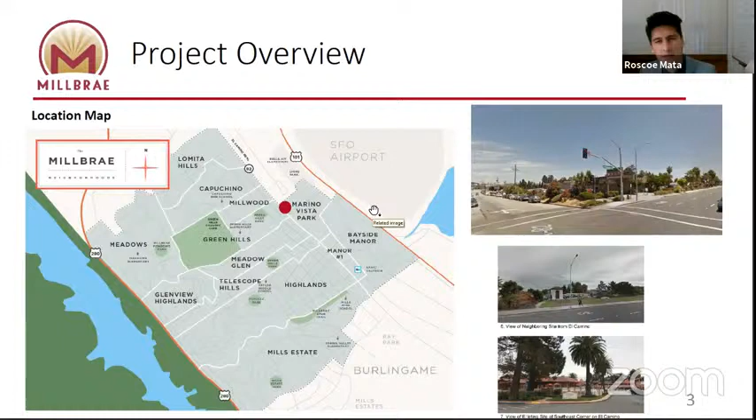The next slide, please. The existing site is approximately 6.7 acres, currently occupied by the Best Western El Rancho Inn. The project includes a lot line adjustment and lot merger to create two separate parcels. The main parcel would be 5.5 acres and would contain a 384-unit multifamily residential community. The other parcel would be approximately 1.2 acres and would be the site of a future hotel, which is being negotiated through a development agreement with the city.

While the hotel design is not included in this particular project, the applicants are here tonight and will be able to provide an overview of the hotel concept being considered.

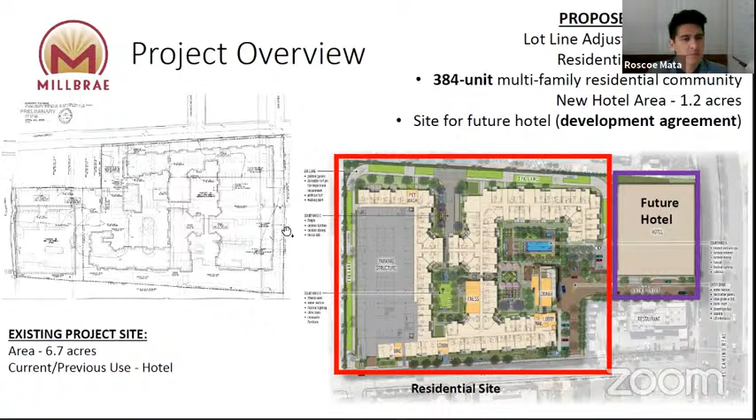The project being proposed under the current form, as you can see here, is proposed to be 384 multifamily units consisting of several types of bedrooms: studios, 1-bedrooms, and 2-bedroom units that range from 508 square feet to 1,360 square feet in size. There's a total of 560 parking stalls, 11 of which are unassigned, and these parking stalls will be unbundled from the main units.

There's also a transportation demand management program that will reduce vehicular trips. The amenities in this project include courtyard areas with a pool and spa, a community lounge area, fitness center, resident mail lobby with parcel lockers, bike storage and a bike kitchen, as well as a leasing office.

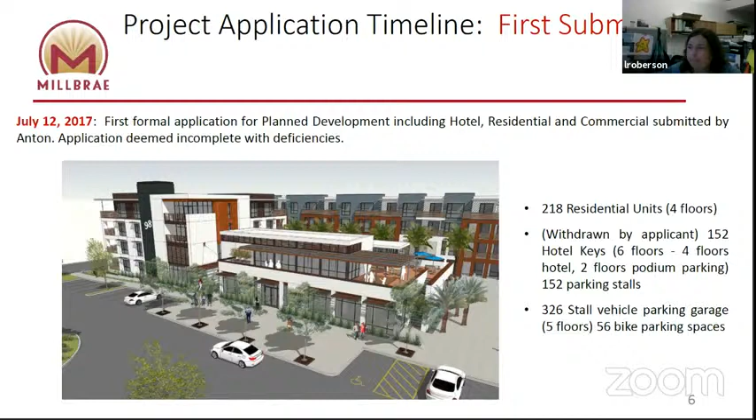2 floors were podium parking, and then a 326 stall vehicle parking garage. On February 14th, 2018, the second formal application with revised site plan of new Planned Development was submitted. This round included 237 residential units, again on 4 floors. This was withdrawn by the applicant, which was the hotel of 159 rooms. Again, it had 6 floors, 4 of which were hotel, 2 of which were podium parking.

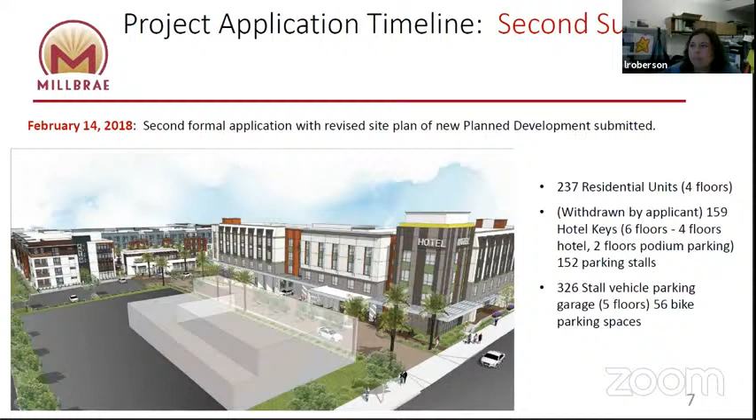326 stall vehicle parking garage was also included in this development application. The third submittal, submitted on May 15th, 2019, was a formal submittal and all previous applications were withdrawn. This application again omits the hotel, the commercial, and the planned development components. With this current submittal, there were 384 residential units, of which 5% or 19 units were in the very low income affordability bracket. There was a 560 stall vehicle parking garage, which was 5 floors, and then there were an adjusted 72 biking spaces.

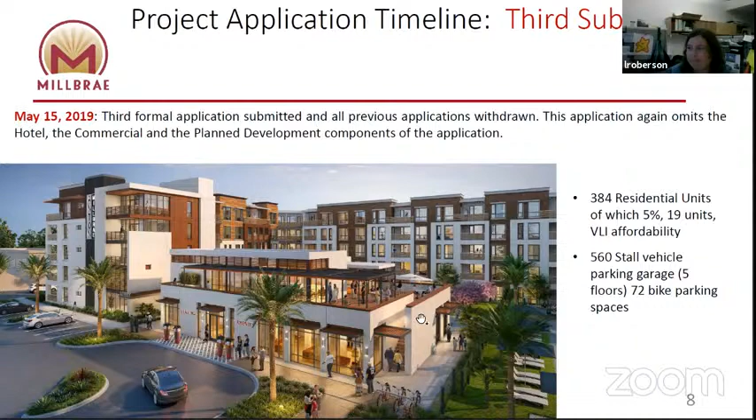That brings us to today's most current application, which was resubmitted on April 6, 2020. It's the most recent submittal. The city and the applicant are currently negotiating a development agreement allowing the residential and hotel to move forward concurrently. Right now, we're looking at 384 residential units, of which 5% or 19 units are still in the very low income affordability bracket, a 560 stall vehicle parking garage, and we're currently waiting for an applicant to submit plans for a 150 to 200 key hotel.

Sorry, Linda, if I may stop you for just one second, back up a little bit. So they're looking for a development agreement. Does it mean that it's requiring a legislation to happen? It's not required in the legislation for that to happen, no. But it's a developer agreement between the city and the developer, is that correct? Right, that's what we're working towards. And that does not require council intervention? Sounds a little surprising to me. I believe that's what's still being negotiated. Okay, got it. All right, so, all right, please continue, sorry. Sure.

The first item we would like to address is urban design and how the proposed design addresses connectivity, specifically for pedestrian and bike users. This slide shows the location of the site and its relationship to key city assets, nearby parks, greenways, and the BART station. A key benefit noted in the proposed design is its proximity to transit.

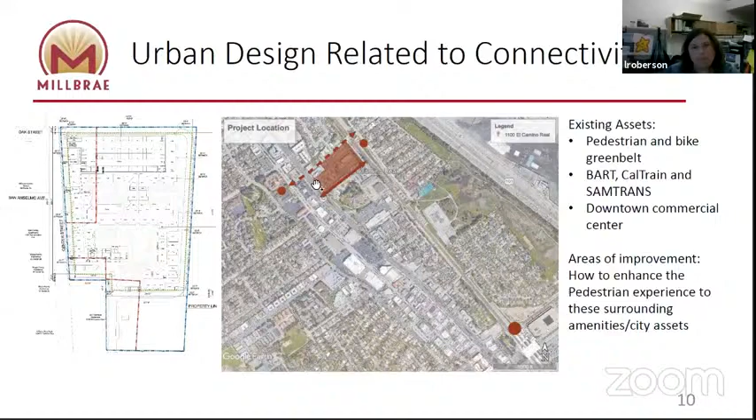Okay, thank you. Sure. This slide is presented in order to make this area a more inviting place to walk. Some proposals include new medians. This would provide opportunities for green infrastructure and management of natural drainage systems, which we're promoting and integrating with the county. It encourages more green spaces and public spaces and improves the aesthetics of the street generally.

We're looking to encourage all users by providing ADA connectivity. We want to improve pedestrian comfort and safety by including wider sidewalks, which make room for more activity on the street, creating more vitality. The new bulb-outs would reduce the distance a pedestrian would have to spend in active traffic right of way, narrowing down those points so it's easier for pedestrians to get from one side of the street to the other. We'd also encourage underground power lines and promote discrete, well-placed utility boxes.

We'd like to enhance some landscape features. This would include improved street furnishings such as lighting, trash, and benches. This is an effort to provide a unique design specific to this neighborhood and create a sense of place.

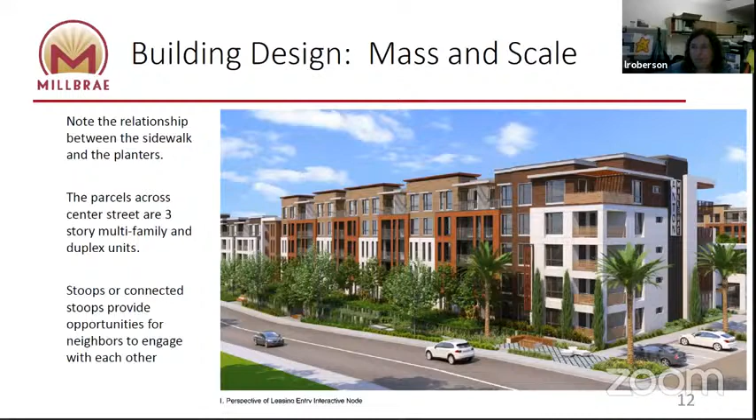What is your definition of a stoop? Sorry, can you say that again? What is the definition of a stoop? You were breaking up, I'm assuming you said the definition of a stoop.

Yes, that's correct. So a stoop is basically an enhanced doorway. It allows a place, similar to what you'd see in New York with brownstones, where you walk out, you have stairs or you may have a ramp, or they're connected so that you have a common place where people can reach that walkway, but it provides an interaction that's direct to the street. It's kind of like a front porch.

Okay, thank you. So this slide demonstrates what the proposed design shows. Not only is it removing you from the immediate street horizontally, but also vertically. So you do have a grade change, but removing that from the sidewalk, I think if we could encourage some connected stoops, we may be able to find some mid-ground for balancing the cost of that with the actual design intent.

Again, the separation of the pedestrian exists both on a vertical and horizontal plane. It's best to encourage diverse users on the sidewalk and promote, again, those chance encounters. Again, the vitality of the street is what we're trying to encourage, and by doing that, the proposed design is removing those opportunities.

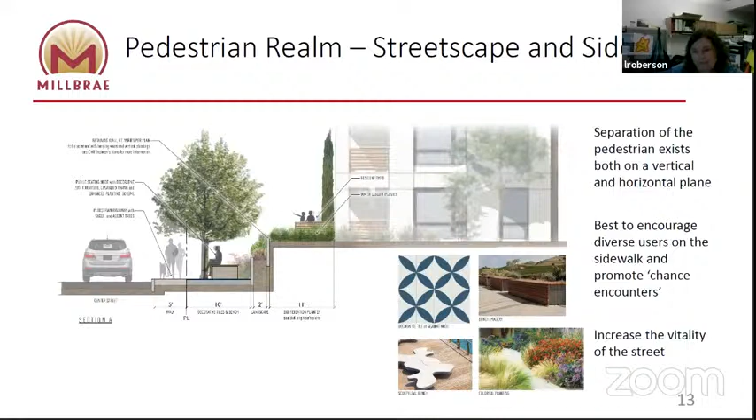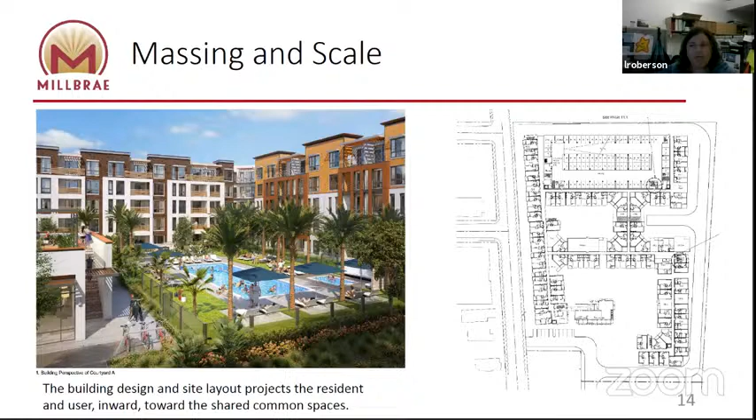This section shows again how those planters create that kind of wall. We need to get more information—I'm sure it's in the set, but maybe one of the designers can give us an exact height of this elevation from the finished grade to the top of this wall. Again, you can see from a different angle how it just separates this building and all of the residents from the sidewalk.

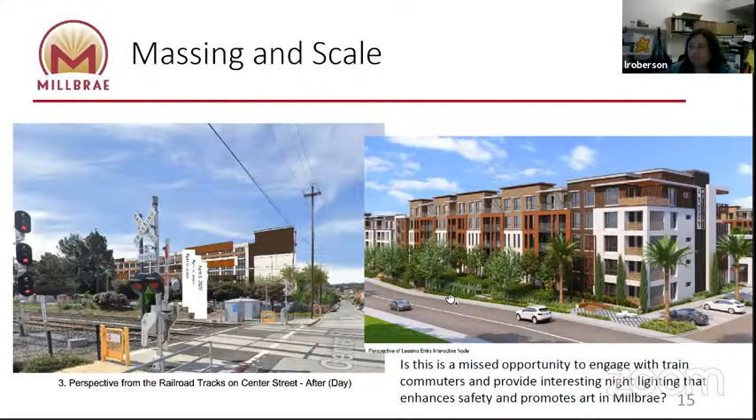Commissioner Fong, as we were discussing, you can see how this sidewalk is consistent—that's a 5-foot sidewalk. We have these enhanced little pockets, but again it's just one section. The consistency of this sidewalk would be 5 feet all the way from El Camino to the railroad tracks.

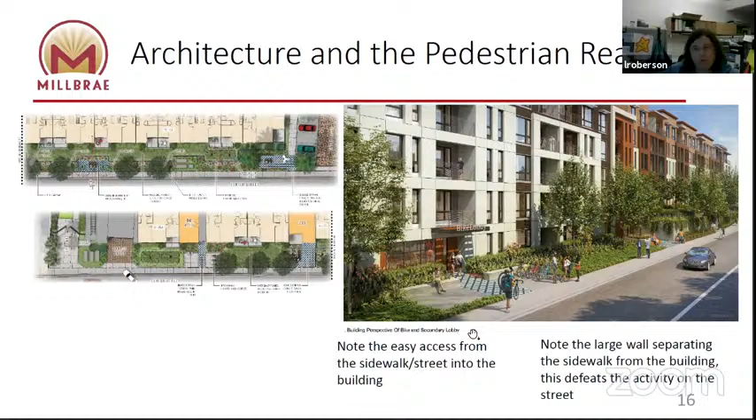This elevation also gives you a better understanding of the relationship between what it would really be like to be standing on that sidewalk and have this wall of greenery. We also want to think about, what if this planting dies? If it disappears, what would that look like for the city? Would we end up with just a wall with no plantings, no softening, no landscape?

Is it a 5-story building, or is it 5-story over podium? It's a 5-story building, the parking is in the garage. So it's 5-story, possibly with frame construction. That would be a question for the architects. Yeah, okay.

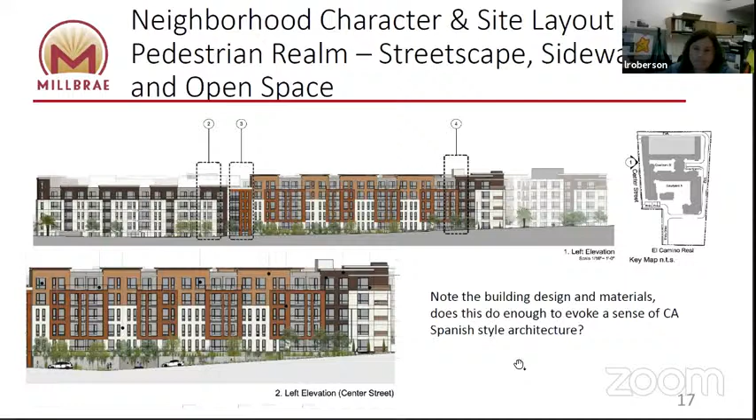Sorry, it's San Anselmo.

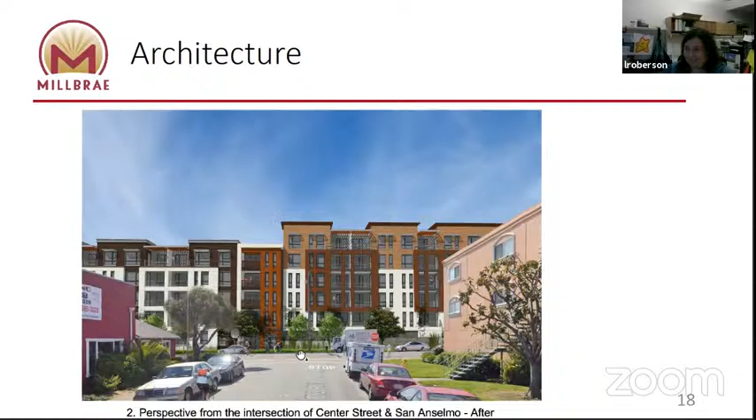So in summary, staff would request that the commission conduct the study session to provide direction to the project applicant and staff for consideration of the design review application for Anton Millbrae Development Project at 1100 El Camino Real. Staff requests input on the following project components: the fiscal impact, the loss of the hotel, and the timing of the occupancy for the new hotel, the integration of the proposed site into the existing neighborhood, the impacts of connectivity to existing assets - BART, the downtown commercial corridor, and Lomita Park School - as well as the architectural design and building style.

No, I don't, sorry, Mr. Robertson, I don't see a financial impact report just yet, so this is yet to come.

Yes, I think we're looking at the fiscal impacts of the loss of the hotel, the existing Best Western. So the loss of the hotel, of the current TOT, along with what the expectation would be should the new hotel be built and operational.

Obviously there's more detail to it, but I assume the financial impact analysis has not been submitted as part of this application. Is that correct? Correct, from what I understand. And again, we're working with a lot of moving targets these days, so that discussion is still open and there's still information that we need to get.

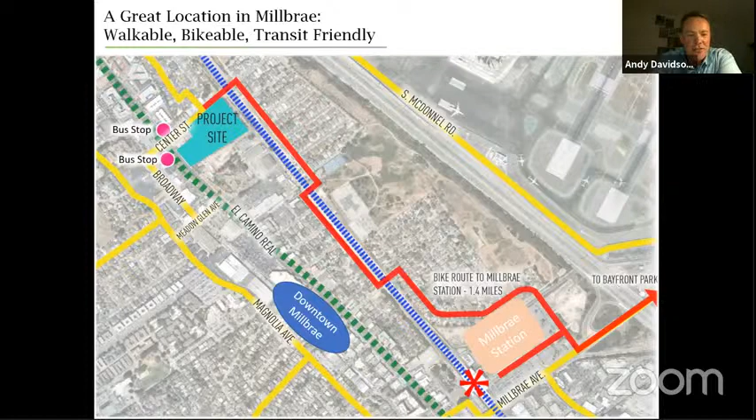To speak more about the hotel, we have a partner, Springboard Hospitality. They have 30 years of hotel and resort experience, operating all over California, in Hawaii, and other places throughout the nation. The key to the hotel is that we have to be shovel-ready, meaning we need the entitlements and environmental document behind us, and be immediately ready to go to design review and construction documents. We have many letters of interest from Marriott, Hyatt and others, but until we're there, they will not fully engage and move forward. That's why we want to get going on the entitlement as we have it in front of you tonight.

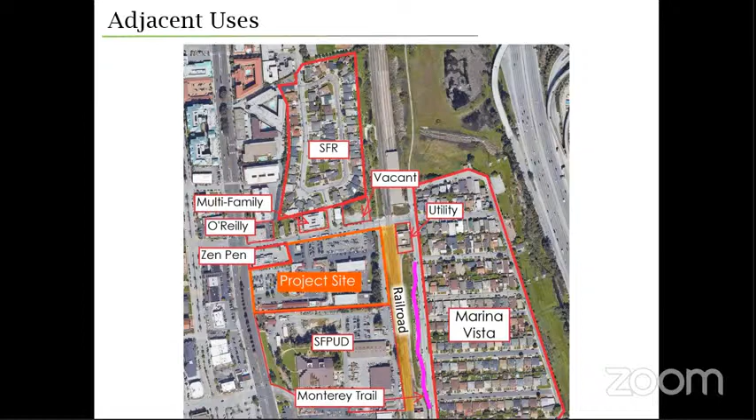So just to give you an idea, we have two street frontages - we front on El Camino Real and on Center Street. Directly at the bottom of the page you'll see the San Francisco Water Utility and also the railroad. So we have two main frontages where we can engage with this neighborhood, and two frontages where engagement will be a little more challenging, fronting the Marina Vista neighborhood and the neighborhood out there.

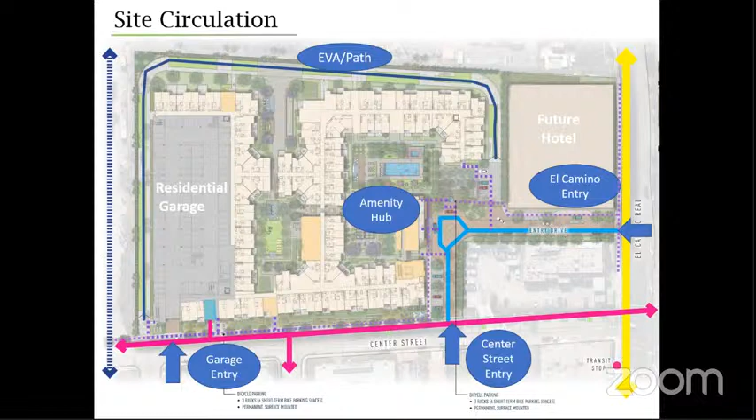Again, here are the multiple access points to the site. You can see there will be an entry drive off of El Camino Real with a resort walk around, and at the end of that entry drive is the main amenity hub. We have a second entrance off of Center, and a garage entrance down the other side of Center Street. At the top left of the page you'll see we have an EVA path for fire access, which is also a multi-purpose, multi-use space. Note there are also several courtyards included in the project to create open space for inhabitants.

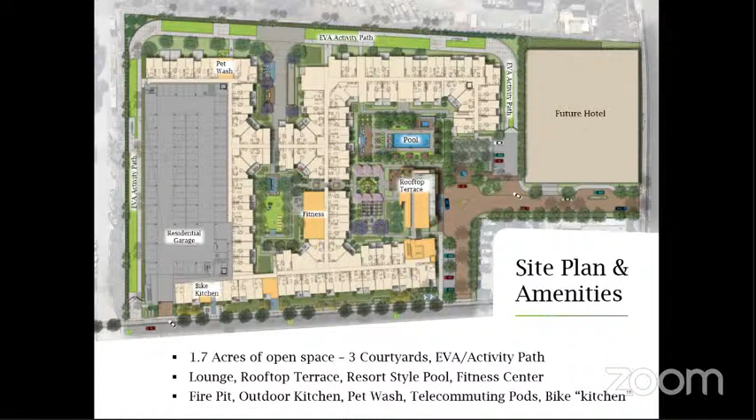Again, you can see that 1.7 acres of the site have been dedicated to open space - there's a lot of open space provided here. You can see the future hotel planned on El Camino Real and the main portion of the new residential building, which is a 5-story wood construction wrap-style building. The residential garage, located closest to the railroad tracks, will be wrapped with residential units. This serves several purposes - residential units help screen that garage so you're not looking directly at it, and it's also a good area for future residents. We've listed some of the amenities that will be provided: fire pit, outdoor kitchen, pet wash, etc.

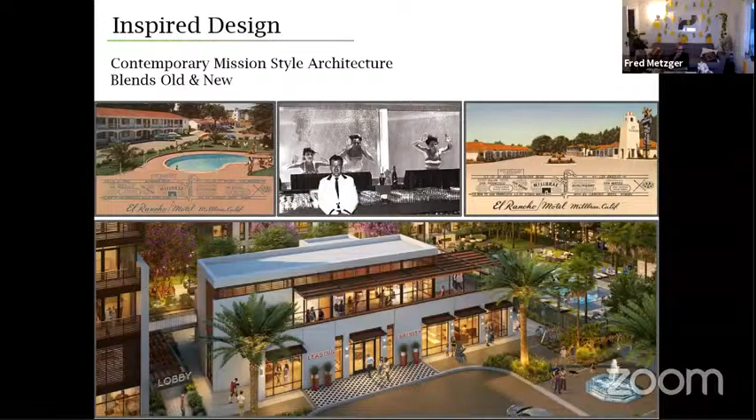Going to the next slide - again, this is a view from El Camino Real.

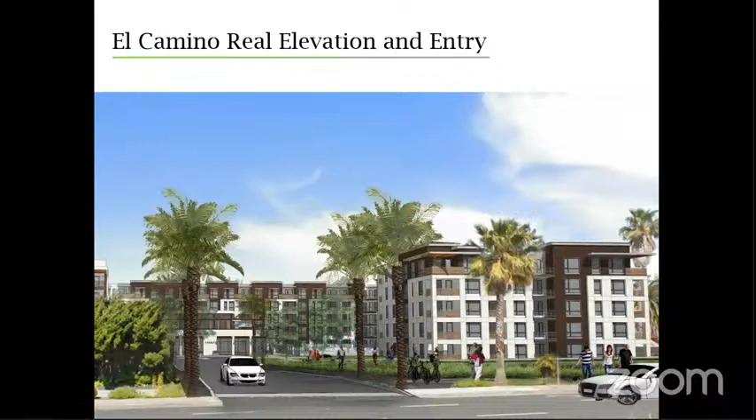Yeah, I think we can hear you better now. Let me tell you, my name is Mark Schattinger. I'm a principal with MJS Landscape Architecture. We were the landscape architects for this project.

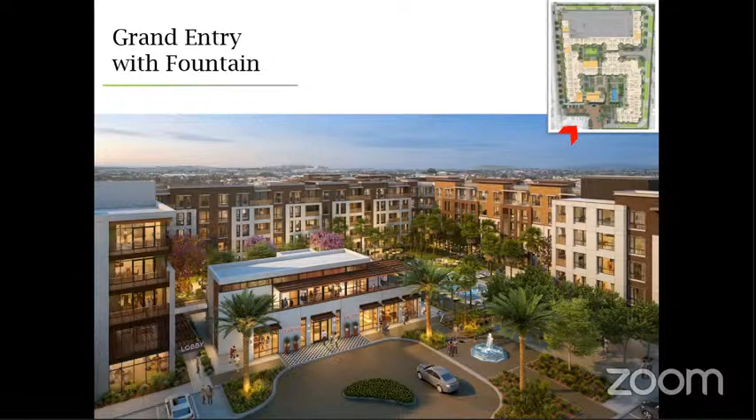So this view shows the two-story leasing club room building. The rest of the buildings, the residential part of the project, is 5-story. But this standalone building is 2 stories with a rooftop terrace, and it's at the terminus of this long processional entry drive.

It's going to have enhanced pavers, so it'll feel very special when you drive by the hotel porte-cochere and go around in this motor court. Off to the right, we plan on having a ride sharing, pickup, meet-your-friend sort of space around the fountain. In the spirit of the landscape palette for this Mission Revival, we hope to have a little olive grove out there as well. When you pull up, you get a peekaboo view of the pool area, which has great southern exposure for sun.

People enjoy seeing other people, they like activation at a property. We always try to put our fitness rooms and rooftop terraces where people can see them, because people want to be with other residents who have like interests as they do. So you have a nice view of the amenities here, and there's additional courtyards behind this building.

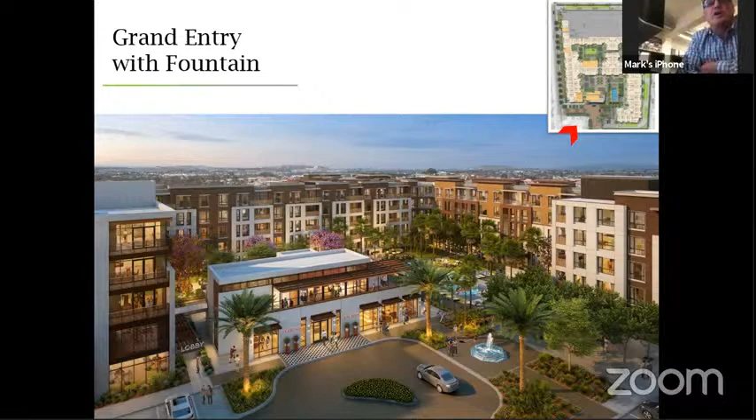So if we go to the next slide, this is a view of the pool courtyard, unobstructed from the entry drive, which is awesome. It'll probably be glass fencing around the pool.

Palms are totally appropriate with this Mission style. We'll use them sparingly, but they are appropriate. There's about 11 palms we're resurrecting from the old El Rancho site, and we hope to use them on this project, salvage them. So this is a nice view of the rooftop terrace, 2-story building with the 5-story building in the background.

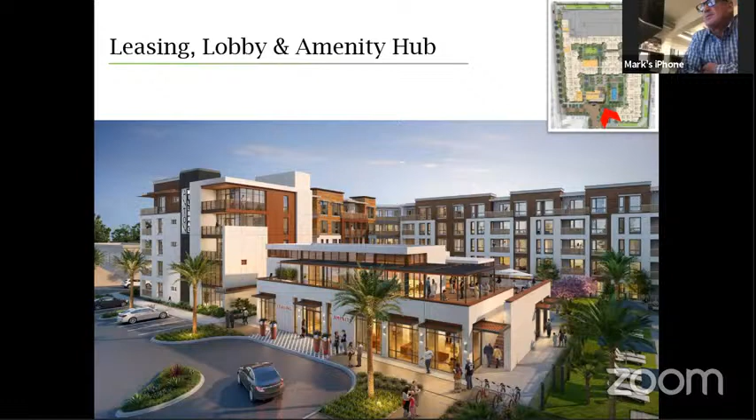Next slide. So we want to get back to Center Street, because I think all the concerns that Ms. Robinson had, we've addressed. We've enlarged the sidewalk to 8 feet, so it feels more spacious along Center Street. There was a request by staff to bring the street tree closer to the back of curb, to provide some shading for the street as well.

We've upgraded all the materials along Center Street, so the site furnishings, the benches, the paving, they're all upgraded materials, yet they're in the public realm. So it's going to feel like a special city project.

There is a tremendous grade change, about 11 feet between the finished floor of the ground level units and the apartments to Center Street. We did look at doing some direct connections to what you'd call stoops, but 11 feet's just too much, took up too much space. It wasn't a matter of cost, it was just too much engineering to make it work.

We think by doing these 2 terraced walls with a nice enhanced concrete block, it would be just as decorative going up there. You still have eyes on the street, you just can't walk directly down there from your patio. There's always a bunch of patios all along Center Street. There's just no direct connections until you get past the mid-block lobby, which drops.

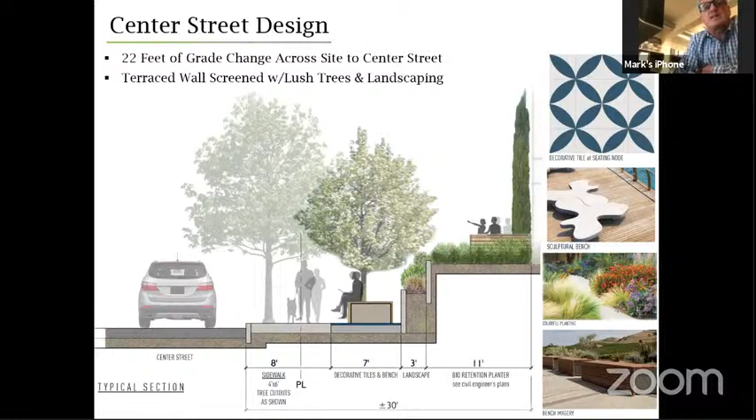But you can see we have a nice plant palette. We have street trees back the street, we carve out spaces. That's the activation for Center Street that we're trying to achieve, identifying these public nodes with special paving, benches to sit on. We even did a little notch for our utilities that are required for every project. So we think we've hit all the items that Ms. Robinson tried to get us to look at.

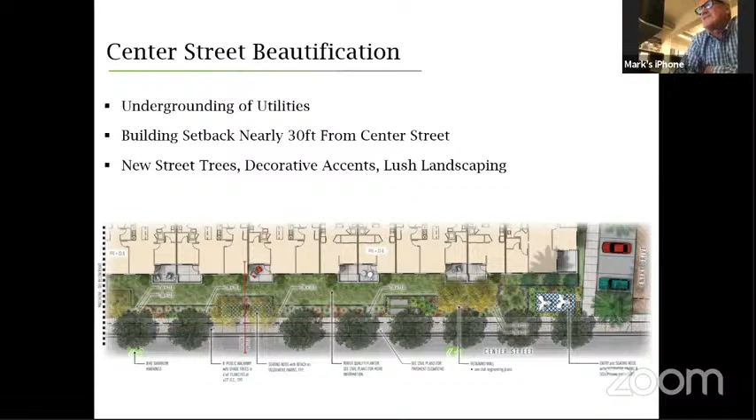Next slide. But also one of the most important things for the residents across the street, we're also undergrounding the utility lines.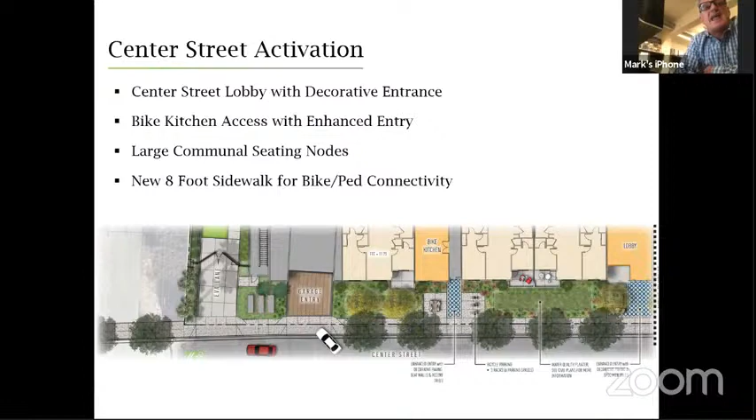And then here, this is back down at grade now. This is the front door for the 300 and all the units in this project. Every resident's going to come through the same garage entry, so it's really important that this also appears and is as enhanced as the front door off of El Camino Real. And there's the bike parking and the bike kitchen right there.

And then here's that perspective view, the same one that was shown earlier. We know we can achieve this with landscaping. We have a 30-foot setback from the face of curb on Center Street to the face of building. We have street trees - right now we're proposing an evergreen tree that gets up about 40 feet, and behind there is a deciduous tree that gets up to about 40 feet.

We have palm trees. As Annie mentioned earlier, not only are they developers, but they also maintain the property, so we know that if the plants die, they're going to be replaced. I was concerned by staff, but I'm not concerned about that at all. Anton - all the projects we've done with Anton, they're beautifully maintained.

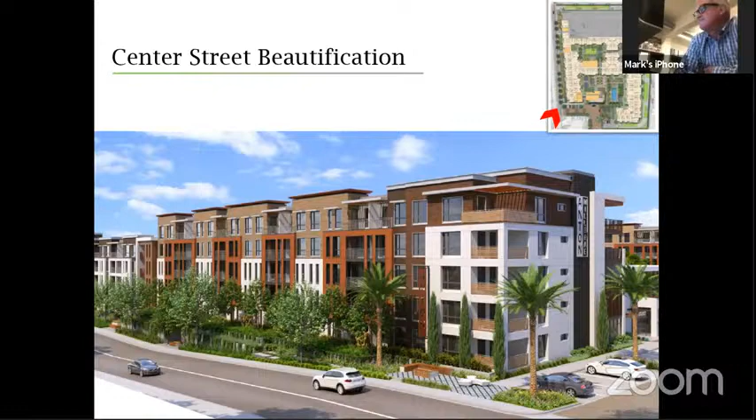And here's a view where there's one of those penetrations that you were talking about, where you can either go through the lobby into your residential unit, or you can go into the bike kitchen.

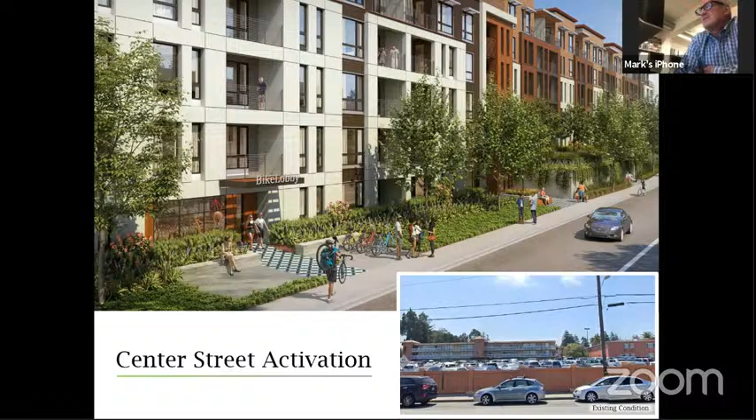And this is the current view below it. We have committed to making sidewalk improvements all the way to the railroad track, extending the 8-foot sidewalk all the way even though it's off the property. We also have tall vertical plant material. Right now we're proposing giant bamboo on the property line, as well as a rhythm of Mexican fan palms that are going to screen part of that building as you are on the railroad tracks.

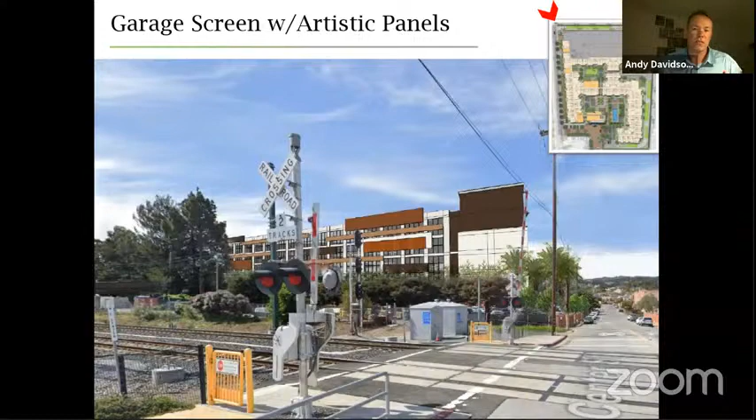Andy, do you want to take this one over? Yeah, if we could just go back to that last slide real quick. One thing I wanted to mention is the location of the garage was strategically placed on our part because we wanted to not turn our back on the railroad tracks necessarily. Those comments are well received, and we've tried to enhance the view of the garage from the train tracks. However, we did want to turn the ears of the residents away from the train tracks, so that's why we've positioned the garage up along the train tracks so that those folks in the residential units have that sound blockade from the trains going by.

So just a clarification, that massive structure there next to the train tracks, that is the parking structure, correct? Yes. Sorry. Yeah, okay. Go ahead.

And that kind of brings us to the conclusion of our presentation. Again, we're really excited about it, and we're really excited working with the city of Millbrae to move this forward. So thank you for giving us the opportunity to present.

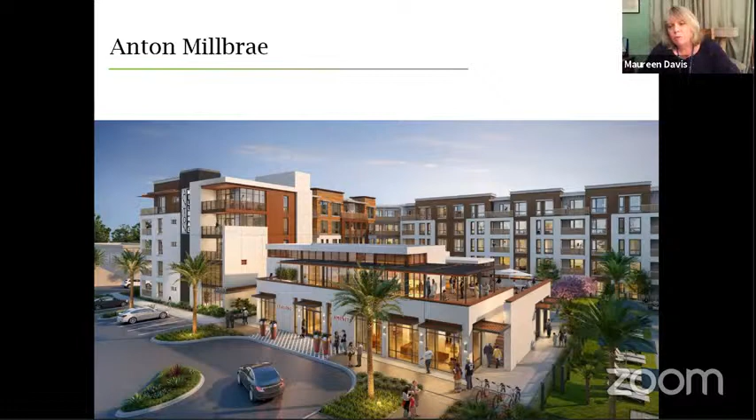Let's start with any commissioner who wished to have a question for either Anton or the staff. Does anybody? I can't hear. Hello? Yes, hello, as in who? It's Maureen. Okay, how are you doing, Commissioner Davis? I'm great, yeah, it's a little tough because I couldn't tell the voice. Sometimes you can't see everybody. Should we take the presentation off the screen so there's more real estate to put the people up? There we go, there we go. A little bit better.

Okay, thank you very much, both to staff and to the applicants for your presentations. I'm curious, what sizes will the very low income units be? You know, studios, 1-bedrooms, and 2-bedrooms? What will they be?

Hi, this is Andy again. It'll be evenly spread throughout the mix.

Is there any chance of squeezing in a couple of 3-bedrooms anywhere in there, to get a few families in the complex? We've got such great schools and families want to live here, and 3 bedrooms are required for some families, so just asking that question.

Sure, we'll get with Fred. His phone works, just his video doesn't. All right, thank you. Is that it, Ms. Davis? That's it. Okay, who wants to go next?

Commissioner Wong, I got your hand. I guess so. This is informational now, and it's a great concept. I like all the thought and effort put into this. I guess it's the third design, so there's been a lot of thinking and thought put in.

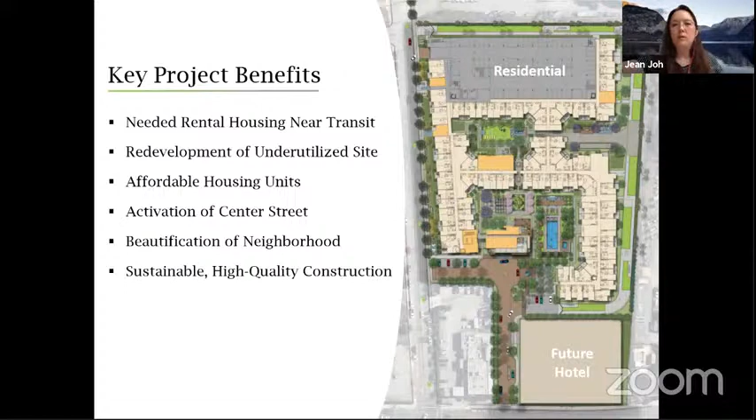So if you can go into pedestrian access, bicycle access, and then how both Center Street and also behind, adjacent to the railroad tracks, what that would look like in terms of pedestrians and bicyclists — what does their path look like? And in addition to that, somebody who's parking in the garage, what does their path look like going to their unit?

Andy, this is Mark, I can take care of this for you. So the purple dash line is the pedestrian routes. We have a pedestrian route that takes you from El Camino Real in front of the hotel to the front doors of the lobby of the residential building, that 2-story Jewel building. There's also a pedestrian route down the new 8-foot wide sidewalk along Center Street that would take you to the Monterey Trail.

We have the bike route in pink and blue. We plan on painting some sharrow signs on Center Street, and there was a desire to cross El Camino Real on Center Street to get to the neighborhood park — we have that arrow going off to the right there. We also have what looks like a private drive that we plan on enhancing from El Camino Real, taking you to the motor court roundabout and then out to Center Street. So we feel like there's a lot of penetrations into the edge of the building.

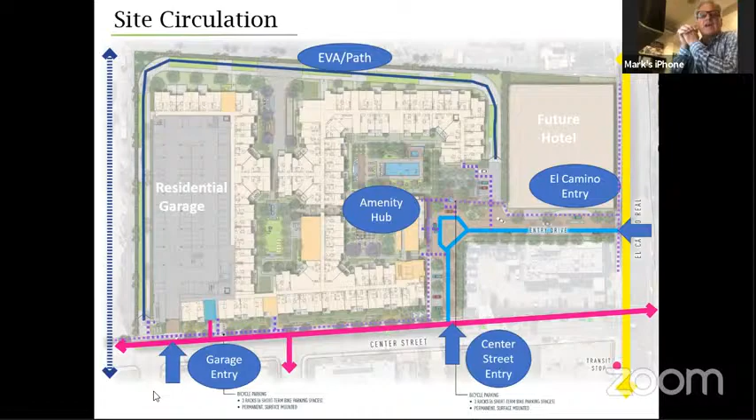On your lighting plan, I didn't notice any lighting on the Center Street side. Can you speak to that? Yeah, I'm going to it right now. So there are pole lights on Center Street, but this has not been updated based on the new articulation of those nodes and the 8-foot wide sidewalk. We would certainly have low-level lighting there for protection and security. Okay, so I'm not seeing it on your lighting plan, so I would want to see that. That needs to be updated.

Yeah, thanks, we appreciate that question and understand the concern there. The biggest issue is that when you decide on a flag, every flag has their own design requirements, and in order to get a flag to fully invest and commit to the project, you have to be able to start construction within a certain period of time. We're too far out to make that commitment. We actually had a flag engaged earlier in the process, but we lost that contract because we couldn't get the project under construction quickly enough, due to all the entitlements we have to go through.

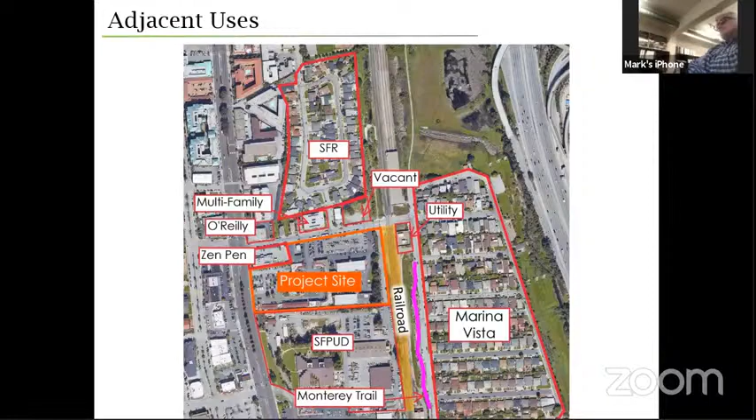Okay, I don't have any other questions. I might have more later. Thank you, you can come back if you think of others, Commissioner Joe. All right, so I have developed a small list here.

Let's go over a little bit about some of the fundamentals of the project. I don't think we, throughout the whole project presentation, thanked both the staff and Anton for bringing this project to the Planning Commission, so that our residents as well as this commission have a chance to take a first look at this site. I think that has been working in the background for a long time, and I appreciate the effort both from staff and Anton Development.

First off, I'd like to know more about the financials regarding this project, for example how the impact fees involved will contribute to city functions such as the school district, or park and rec. Part of it might even go to the rec center if that possibility exists. And how much of those impact fees, if any, would go into infrastructure upgrades and so forth. Can either staff or the applicant elaborate on that?

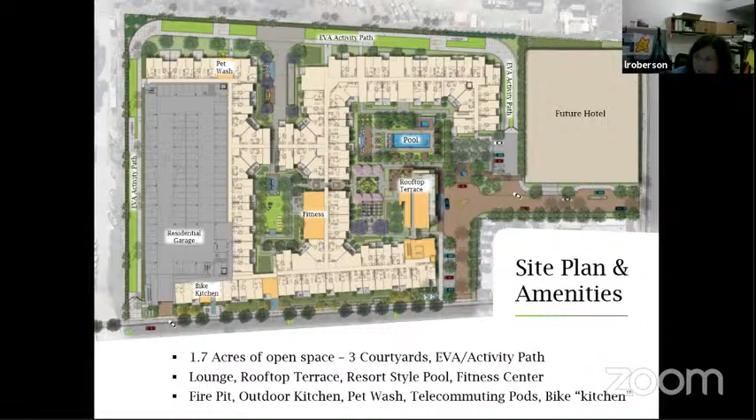The El Camino, are you talking about the exhibit that was on earlier, Ms. Roberson? Sorry, you were breaking up there, Commissioner. I'm looking for the slide that I think you were talking about.

Let's see if I can share this again. Take your time, Linda. Is that the slide we're looking at? Can you see that? Not yet. Waiting for you to load. Oh, lost it, sorry. Yeah, there you go. Okay, here we go. Is that the slide we're talking about?

My question earlier was trying to figure out, as part of this site being redeveloped, we're bringing in 380 some units, potentially 600, 700, 800 new residents. Other than the utility, such as the power pole being removed and moved underground, anything else that would need to be upgraded to accommodate almost 400 residential units and maybe another 200 room keys?

I believe there would be. I would have to talk with Public Works. I don't know if our director is still online to speak to that specifically, but that may be negotiated with the development agreement. What we're looking at currently is not so much the infrastructure improvements as the connectivity and suitability of this site within the existing context.

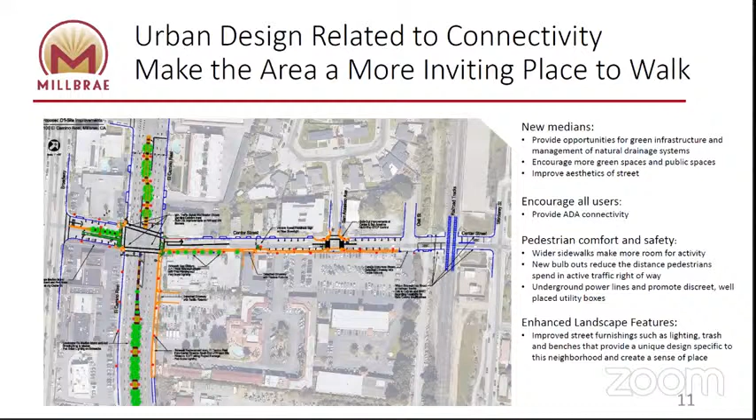Sorry about that. I just wanted to say that we pride ourselves, as Andy was saying, we understand the importance of engaging the community in a project like this and its importance to the city. We're going to make sure we do extensive outreach, both to the neighborhoods immediately adjacent to the project, on Center Street, along San Anselmo and Landing Lane, and the Marina Vista neighborhood to the east. We'll also be doing outreach to other stakeholders interested in this project.

So you'll see a combination of different types of outreach. Some will be more one-on-one or small group outreach, and we'll also have larger community meetings as well. Sure, very well, thank you.

So another question is a little more technical in nature. I see that through the staff report, everything seems to fall into the zoning requirement, except the height, which is from 40 feet to 63 feet, 62 feet 3 inches. Is that correct? That's correct. The applicants, as a result of providing the 5% BMR units at the very low income level, are requesting a waiver of the height, which they're allowed under density bonus. Right, so that is the bonus waiver they're seeking, the height limitation. Correct, okay, very well.